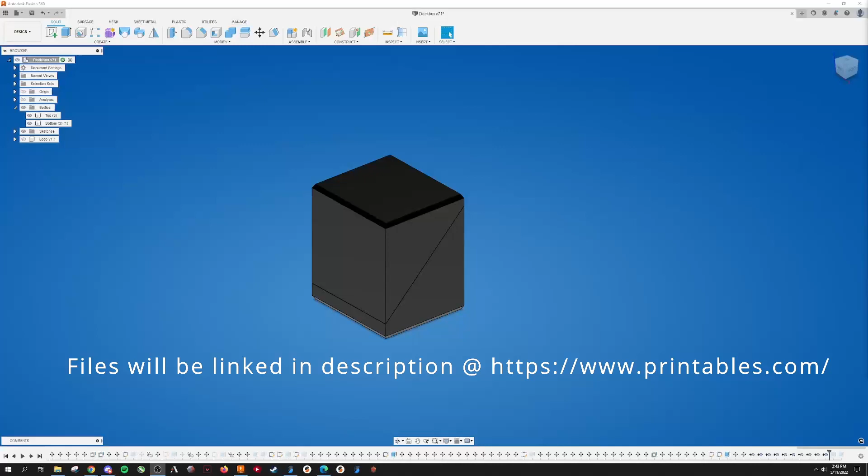Okay, gonna do a quick video overview on this deck box. Very simple design, just for Magic. I've got it set roughly for normal competitive deck size. If you wanted to make it for Commander, I'm gonna post the F3D and the STEP, but you'd probably grab these and then the accompanying top faces and give yourself an extra, I don't know, 15 to 20 millimeters, however much.

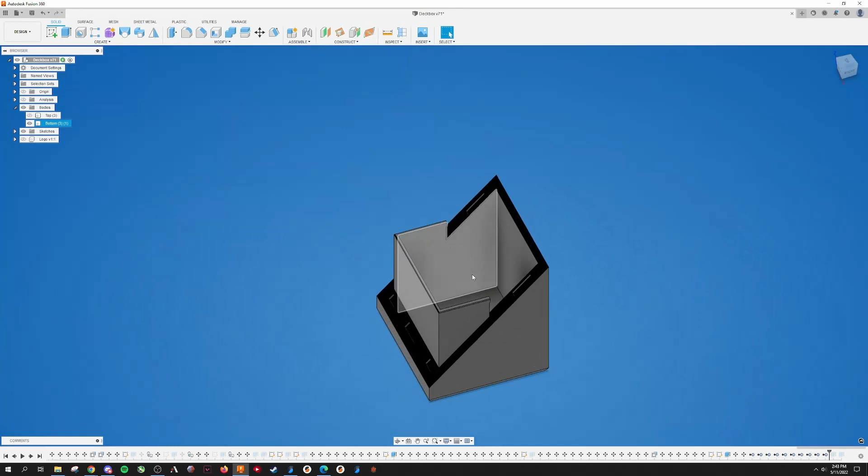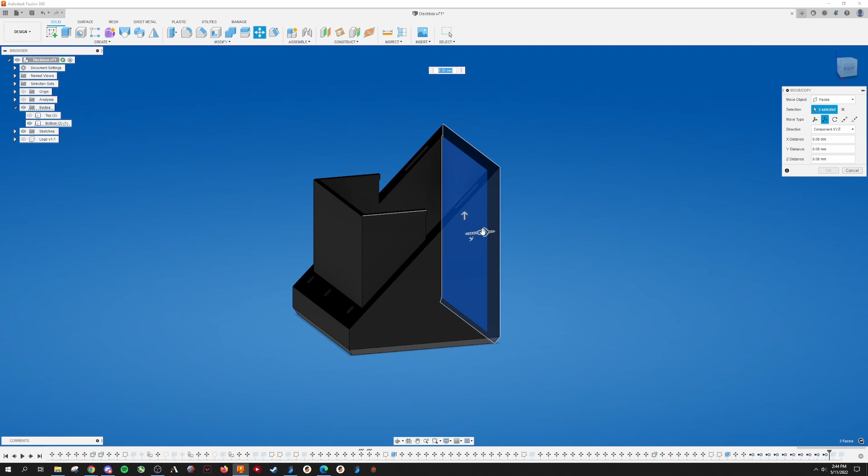This comfortably fits a regular deck. It will pretty snugly, but I think reasonably fit a perfect fit normal deck. That's what I have in right now, just a modern deck, so 60 plus 15, perfect fit. It's a little snug, but I think it's good. You could also, if for some reason you don't like it, give yourself an extra like 3 millimeters or something. I've got magnets here so that it doesn't open in your bag, because it is like a little friction, I don't want to say lock, but I guess like lock fit.

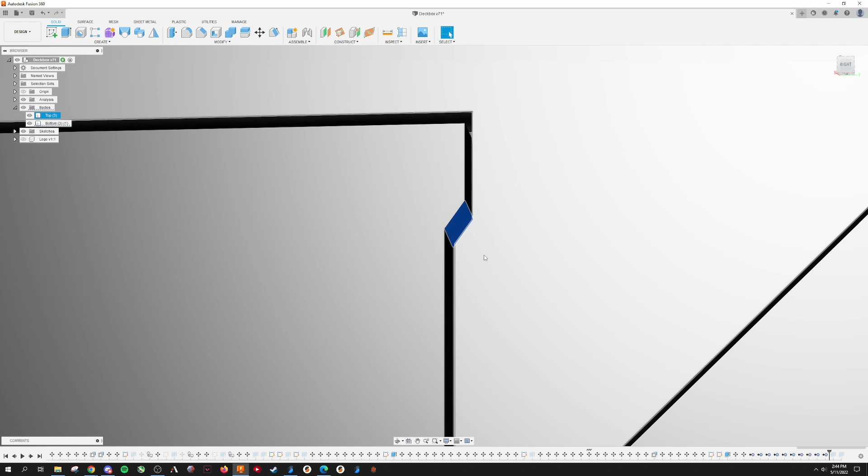Here, we'll go ahead and show you from the side. So essentially, the tolerances are a little loose right here. If you make it too tight, you're not going to be able to open it once you close it, which is not good, right? But if you do find yourself having issues with it opening in your backpack, which you shouldn't, move this down by, say, 1/10 of a millimeter, 2/10 of a millimeter, something like that. But I would probably just keep it where it is. Go ahead and rehide that.

But yeah, this is essentially so that when you grab the box and you move it up slightly, this doesn't happen, right? So this stops the movement. So we'd probably call it 0.75-ish, right? It's going to hit that, so it'll slightly open, but hopefully not much. I haven't had it open in my backpack or anything like that. It's just something I kind of baked into it.

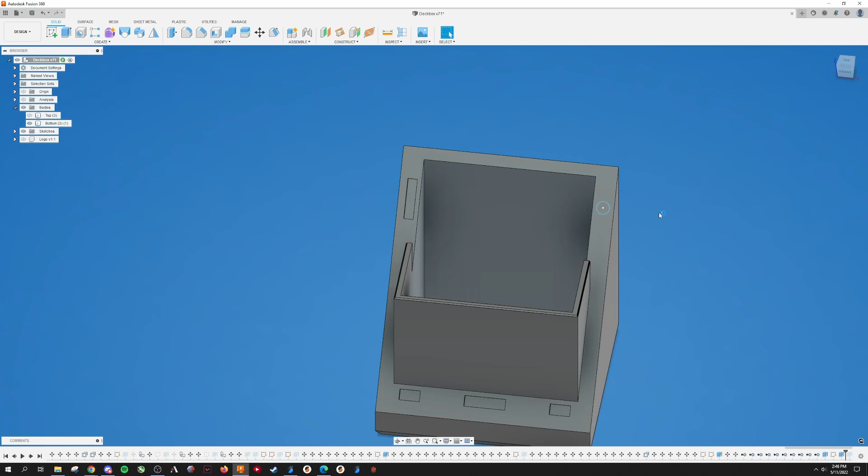and do something like a circle, call it like 5.2, give it a little bit of tolerance, go 1.2, maybe even a little more, and then just keep it roughly centered so it's not too close like this here. You want to avoid having it too close, right? So I just keep it roughly centered, and then that should be fine. You could add more, but you just replace those if you have some other magnet size you want to use.

I don't know if I said, but I'll be posting the F3D and the STP files, so you can go ahead and edit those, because this is a very simple design. You could probably mock it yourself in like 2 minutes. But yep, that's what this is, and I'll switch over to a video of me actually showing my deck inside it, so you can see that it works.

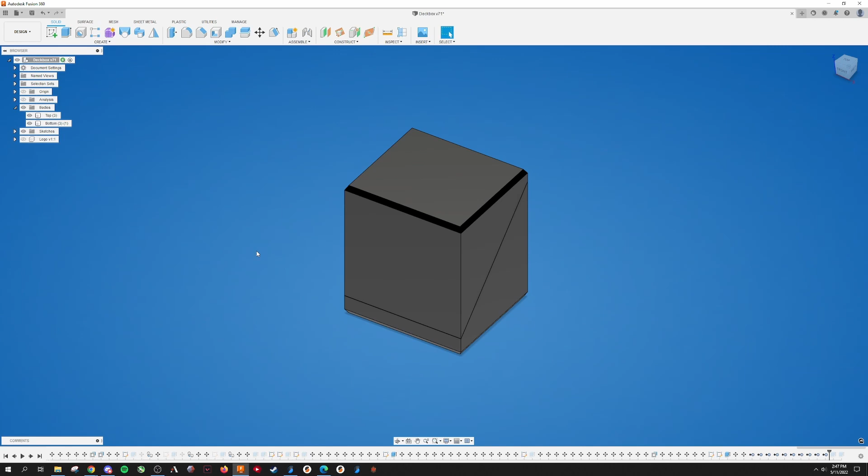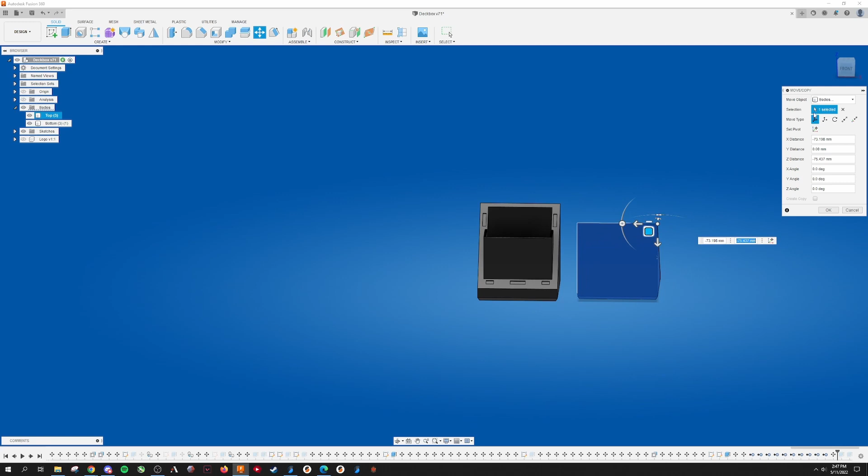I guess the last thing is, due to this base, you're going to want to make sure you have really good bed adhesion, because you don't want this to warp while it's printing. I definitely had some test prints warp, and it's pretty annoying. I'll also say I print it in this orientation. Here we go. Print them like these with no supports.

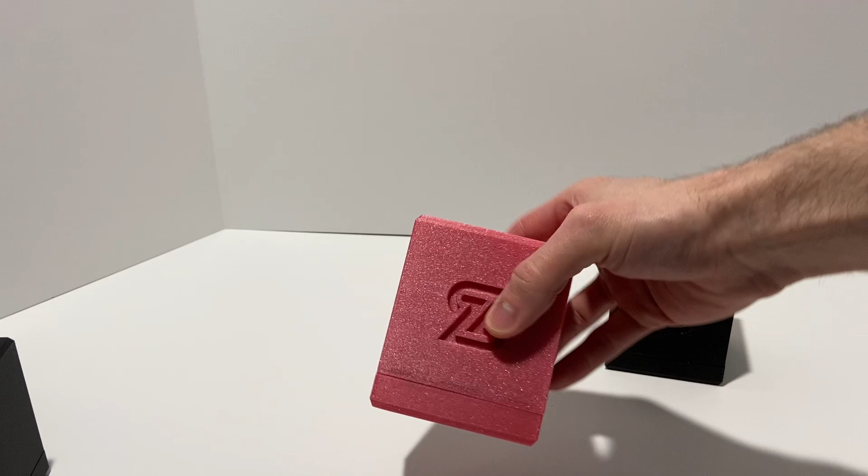Okay, so I got a few of these printed deck boxes here. This one's a bit old, so it's slightly smaller than the rest. But just so you can see, shaking it up and down, if I really try, I can get it to separate. That's if I throw down real hard. You wouldn't be doing that normally, but I did change the tolerances since then. I've got one here with a random box of cards. You can see right here, it actually catches it. So even though the magnet's separated, even though I'm throwing downward force, it's not going to separate.

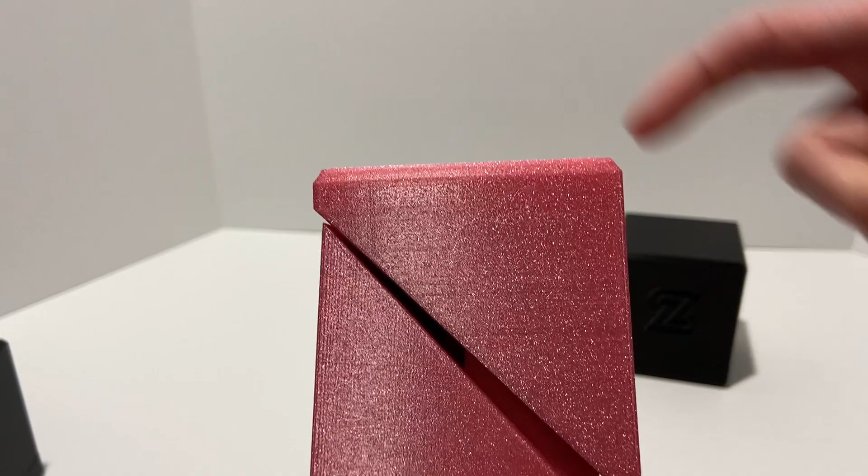When you take it off, instead of going straight up, you want to go back and up to get out of the little lip there. It's got a bunch of cards in there. I would probably keep a sleeved card at the front here. It's just personal preference. Same thing for when you put them back. You can push straight down, but it's easier if you push back and then down. So like that.

And then here's just an example of a perfect fitted deck in here. It's about how much room you'd have, so 60 plus 15. Obviously add more room if you're going to have a bigger deck or you're going to play Yorion or something. Good luck.